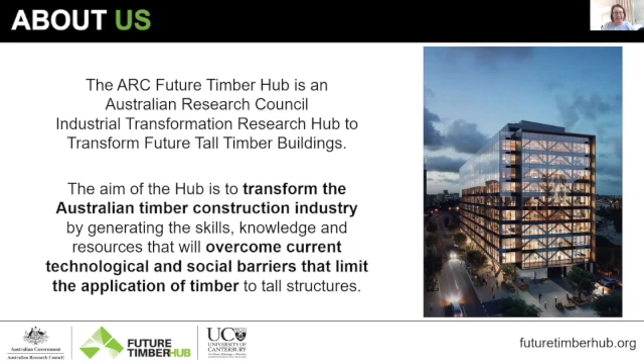Just a little bit about the ARC Future Timber Hub. It's an Australian Research Council industrial transformation research hub to transform future tall timber buildings, Future Timber Hub for short. The aim of the hub is to transform the Australian timber construction industry by generating the skills, knowledge and resources that will overcome current technological and social barriers that limit the application of timber to tall structures.

By bringing together a variety of partners, we've got experts from industry, government and academia: the Queensland Government Department of Agriculture and Fisheries, the University of Queensland, the Queensland Fire and Emergency Services, Hyne Timber, Arup, Lendlease, Scion, University of Canterbury, Griffith University and the University of British Columbia. Together we formed a unique partnership that spans the entire timber supply chain from primary producer to construction regulator. Our interdisciplinary team includes product manufacturers and scientists, architects and structural engineers, fire safety engineers, and construction managers.

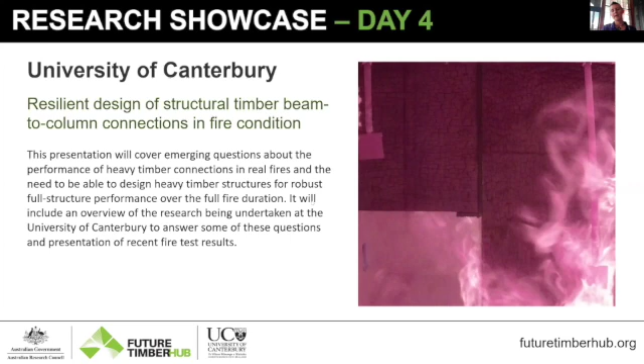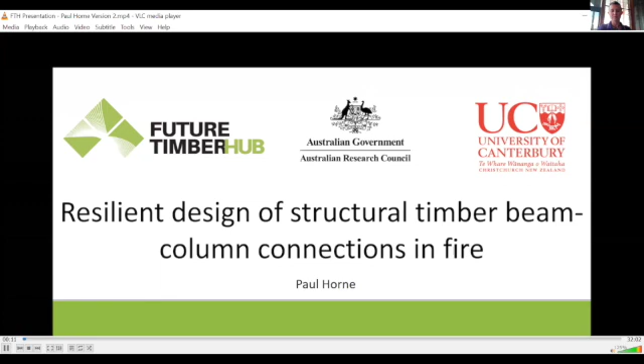Hello, my name's Paul, and thanks for tuning in to my presentation looking at the research that I'm doing on timber beam column connections in fire. In this presentation, I'll start by briefly discussing what fire exposures to structures look like and what we're concerned with. I'll then give a quick overview of post-tension timber structures, which are the type of structure that my research is primarily focused on. I'll then give you an overview of my research project, and then we'll look at the results from a recent fire test that was conducted 3 days ago.

Building codes require that structural elements have fire resistance ratings or fire resistance levels. Let's revise how these ratings are determined for structural elements.

A test specimen is constructed in a furnace and is loaded. In this case here, I've shown a floor, but it could be a beam, a column, a wall, or other type of structural element.

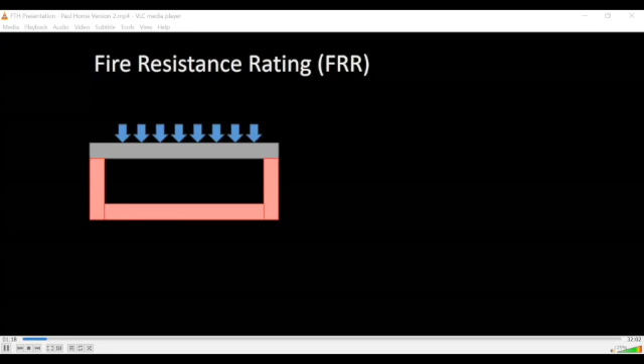The furnace is turned on, and the temperature inside the furnace follows the standard fire curve, which is shown here. This means that the temperature inside the furnace is given by this time temperature relationship.

At some time, the structural element will fail, at which time the failure time is noted. In this case, 65 minutes. But to determine the fire resistance rating, the failure time is rounded down to the nearest multiple of 30 minutes. In this case, it would achieve a fire resistance rating of 60 minutes.

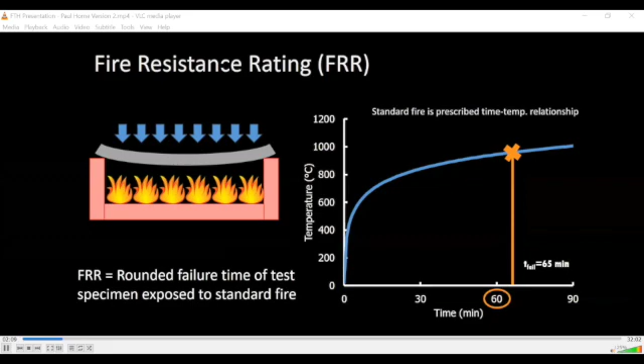This figure shows the standard fire in comparison to two real fires. You can see that the real fire given by the orange line heats up quicker and reaches a hotter temperature before decaying, while the yellow fire takes a much longer time to reach its maximum temperature. In comparison, the standard fire in the blue line is always heating up and does not have a decay phase.

But as we've seen, real fires, in comparison to the standard fire, have variable growth phases, decay phases, and durations. Real fires are complex and depend on many parameters, including the compartment, the size of the compartment and the compartment linings, the ventilation to the fire, and the fuel and its locations within the compartment.

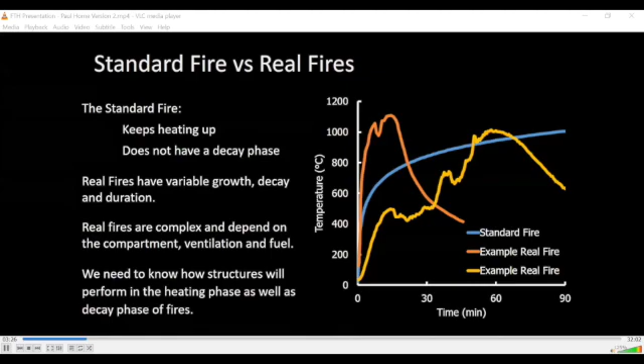Therefore, if we want to design structures so that they stand up in real fires, we need to know how structures will perform in the heating phases of fire as well as in the decay phases of fire.

The other thing to consider is the structural behavior. The structural behavior of a structural element in the standard fire test is much different to the structural behavior of that same element when exposed to a real building fire. For one, as we've seen, the fire exposures will be different, but the loading and the boundary conditions on the structural member will also be different.

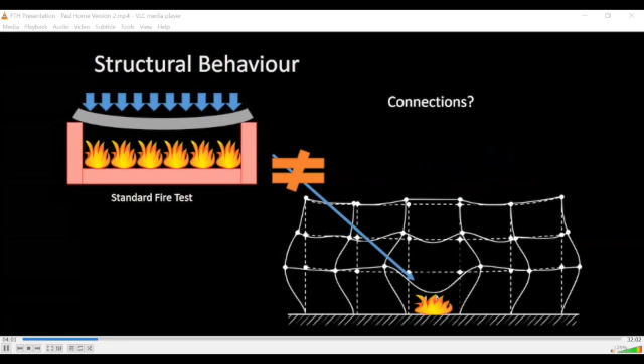Furthermore, there's the question about how the connections perform in a fire and how these affect the global structural response. And we need to know not just how an element performs in a fire, but how the whole system will perform in a fire. So, because the performance in a test is not the same as the performance of a real structure in a real fire.

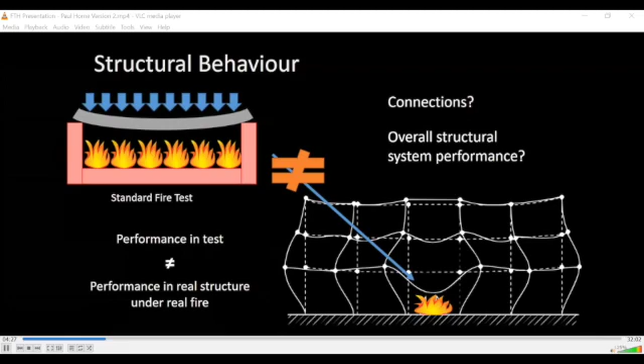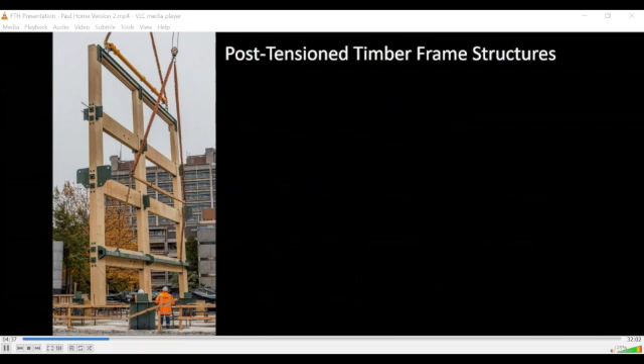Post-tensioned timber frame structures allow for the construction of large multi-story heavy timber frames.

This technology allows for the fast construction of the primary structure because many moment resisting connections can be created in a single stressing operation. In high seismic areas, a low damage lateral load resisting system can be created with energy dissipators that can be easily replaced after an earthquake, and the structure recenters.

For cases where the seismic load is much less, this technology can be applied to gravity dominated loadings, which allows for the creation of long spans utilizing deviated tendons.

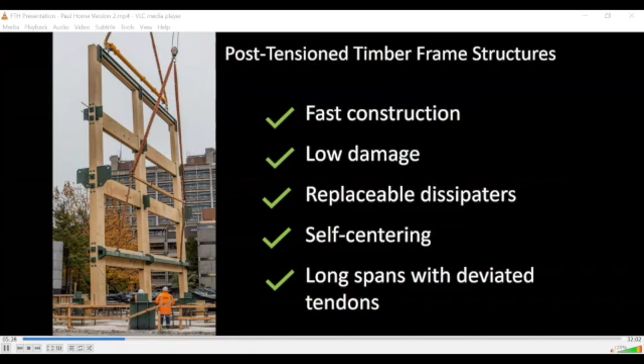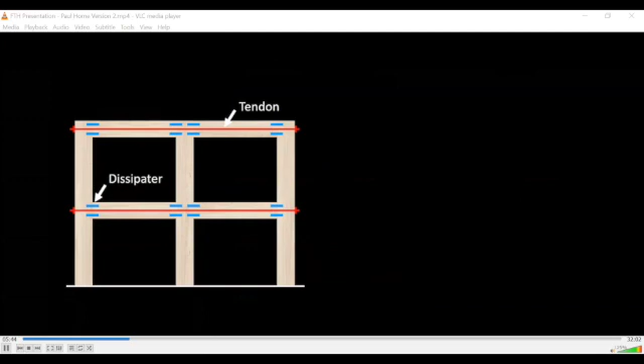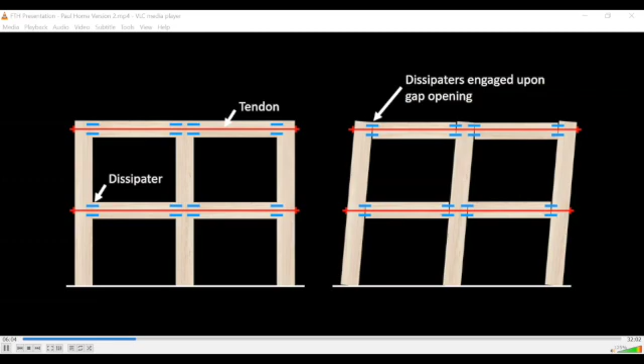Post-tensioned timber frame utilize a tendon that runs the length of the frame inside the beams and the columns, and dissipators across the beam column interface in high seismic areas. When a seismic action acts on the building, the connections rock and a gap opens, engaging the dissipators to dissipate energy. Because the tendon is tensioned up, it acts to recenter the structure after a seismic event.

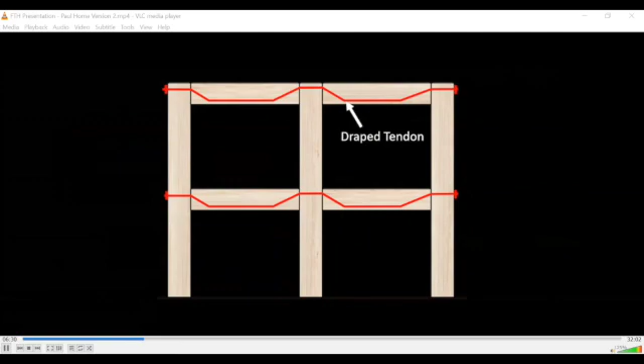For structures where seismic actions are much less of a concern and gravity loads dominate, post-tension technology can be used to achieve longer spans utilizing draped tendons, which exert a vertical upwards force counteracting the downwards gravity forces from gravity loads.

This type of structure uses a tendon that runs the length of the frame inside the beams and the columns, which is tightened up to provide a compressive force along the axis of the beams and the frames. Then dissipators can be installed either side of the beams, and these are activated when the column rocks. And then there is a shear key, which can be internal or external, to transfer the shear from the beams to the column.

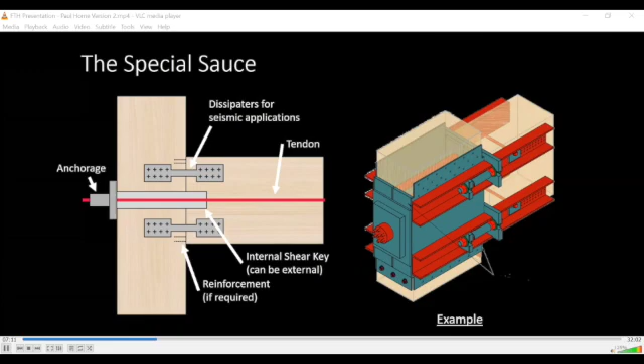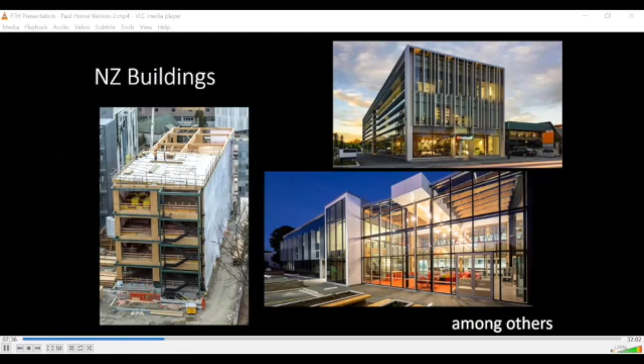Current design practice for the design of post-tension timber structures in fire uses what's called the unprotected approach, where unprotected refers to the fact that the tendon and the anchorages are not protected from the fire. Because of this, it is assumed that the tendon and the dissipators heat up and lose all strength and stiffness, and consequently the beams are treated as simply supported.

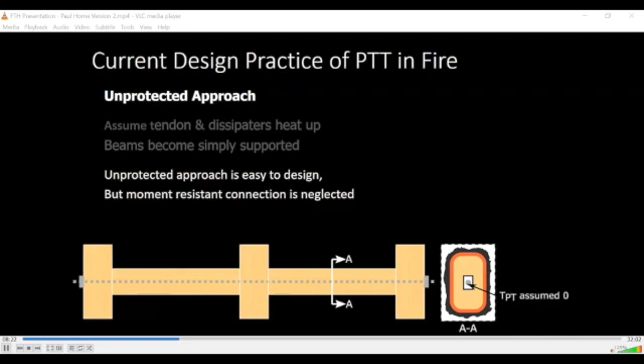While the unprotected approach is easy to design for, the moment-resistant connections are neglected. Of the 7 post-tension timber buildings surveyed in 2013 in New Zealand, they all used the unprotected approach, where the effective sections of the beam and column are reduced by the char depth and a zero strength layer to account for the hot wood under the char layer.

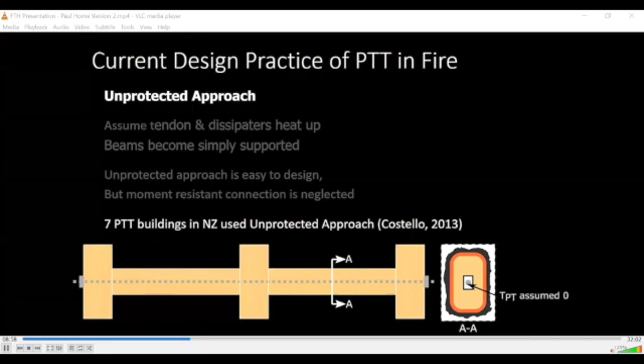And the tendon and dissipators are neglected. There are several problems with this approach. The first is that the design and construction effort and expense of the post-tensioning system and the dissipators is wasted because they are simply neglected.

Perhaps most importantly, these design methods do not actually assess how the connection will actually perform in the fire. Furthermore, only the standard fire exposure is recognized, not real fires, which have decay phases. There's no experimental basis for the performance of these connections in fire, and so the effect of detailing is unknown.

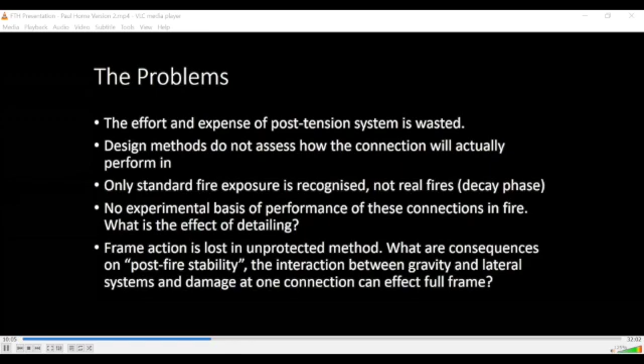Frame action is lost in the unprotected method, and so there are questions about the consequences of this on post-fire stability and the interaction between gravity and lateral systems, and the fact that damage at one connection can affect the full frame because the tendon runs the length of the frame.

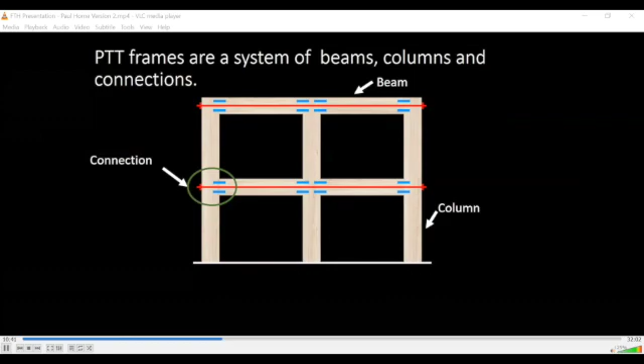Post-tension timber frames are a system of heavy timber beams, columns, and connections consisting of tendons and dissipators as required. In a fire, the heavy timber beams and columns will behave as typical heavy timber members do in a fire, with a charring layer forming on the outside of the cross-section. The key to understanding the full system performance of these structures when exposed to a fire lies in understanding the connections, as these are the critical components which will govern the overall structural performance.

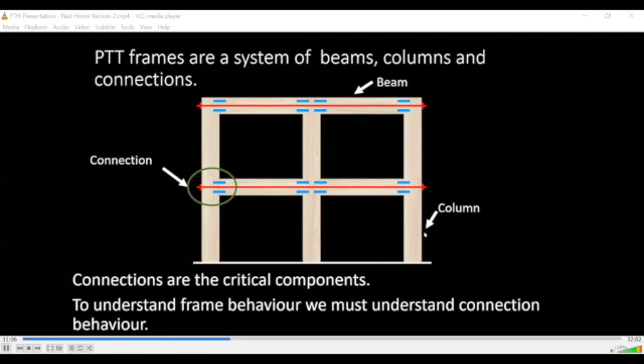So, if we want to be able to design our structures to perform in a real fire over the full duration of that fire, we need to understand how the connection behaves to understand how the whole frame will behave.

To illustrate how different connections in timber structures perform differently to the heavy timber members themselves, we'll examine this simple case. If we take a cross-section through this beam after it has been exposed to a fire for some time, a char layer will have formed on the surface, underneath which there is a hot layer of wood, which we call the zero strength layer, because it is so hot that we consider it to have zero strength. And the remaining internal of the section is the load carrying portion of the section, known as the effective section.

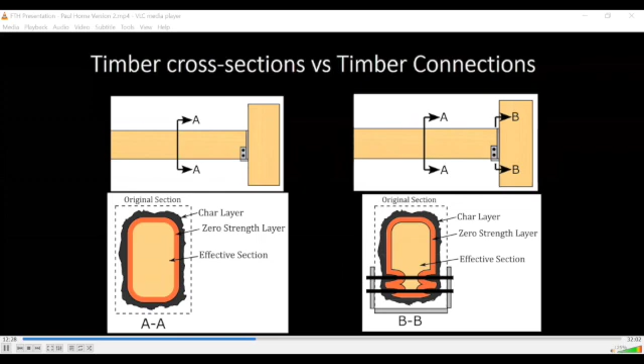If we compare this to a section taken through a connection which has a steel bracket with 2 bolts here, we see that because the steel components heat up, they conduct heat deep into the inside of the connection, and they change the zero strength layer and change the effective section of the cross section at this point. And this illustrates how different the performance of timber connections is to the performance of heavy timber cross sections.

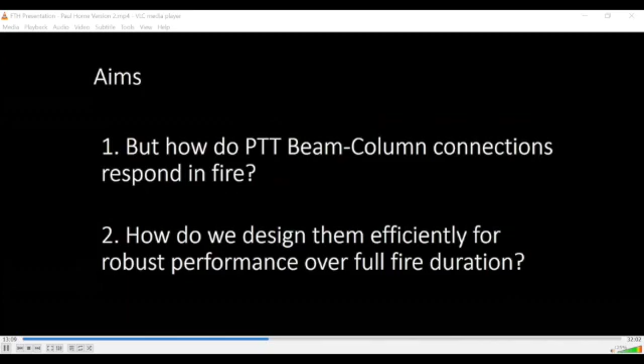So given that we need to be able to assess the full structure performance of buildings exposed to fire, of which the connections will play an important role, my research has 2 aims. The first is to investigate how post-tensioned timber beam-column connections respond in fire, and 2, how do we design these structures efficiently for robust performance over the full duration of the fire. And while my research focuses on post-tension timber buildings, the general principles will apply to all timber buildings.

So since we know how these connections perform at ambient and how in general timber and steel materials respond to fire, we can come up with how we expect these connections to perform when exposed to fire. During the initial stages of the fire, the tendon force in the tendon will still be relatively high, and the decompression moment at the connection will be greater than the applied load.

But as the tendon heats up and the decompression moment decreases, a gap will eventually open at the connection so that the dissipators can be utilized to provide additional moment resistance.

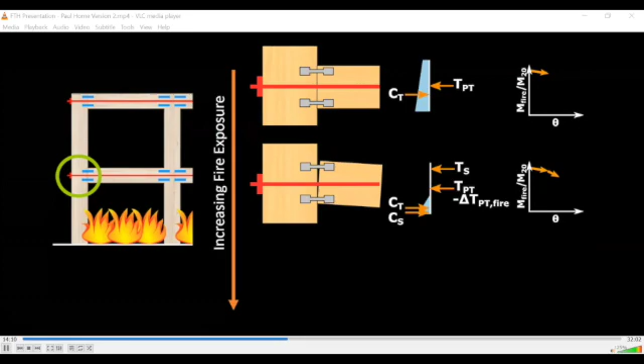As the tendon continues to heat up and undergo thermal elongation, the tendon force will continue to decrease, and the dissipators will heat up and lose strength and stiffness, and so larger and larger rotations will be required to maintain the load-bearing capacity of the connections.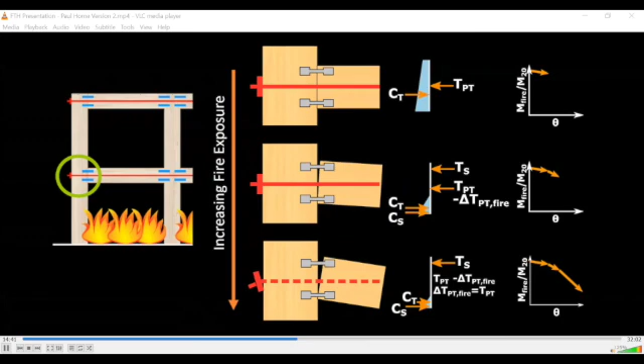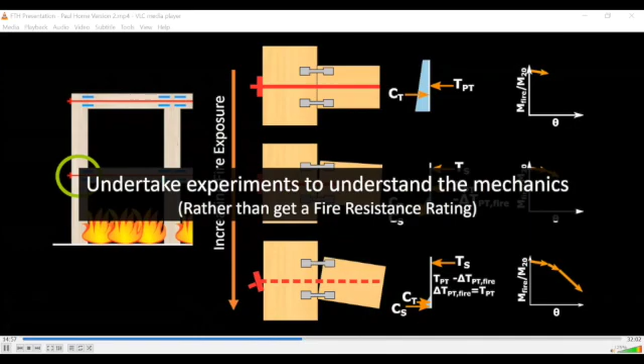But we need to undertake some experiments to quantify all of these effects and break down the complex interactions between all of these components. So we need to undertake experiments to understand the mechanics of how these connections perform, rather than undertaking fire tests to get a fire resistance rating as traditional fire testing does.

My experimental program has 7 tests in total. 2 of these tests examine connections under shear loadings. The first of these uses a steel bracket screwed to the column, while the second uses a CHS epoxied into the beam.

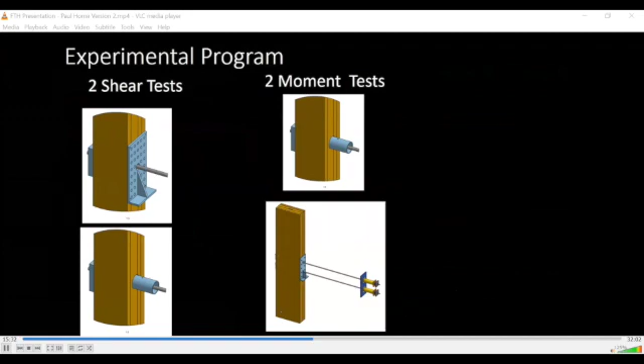There are 2 tests where connections are subject to moment loads. The first of these uses a CHS epoxied into the beam, and the second uses a steel bracket fixed to the column with coach screws.

And then there are 3 tests that look at the same connection under the same loading, but where the fire exposure is changed, to examine whether a fast cooling phase or a slow cooling phase is more severe for timber connections.

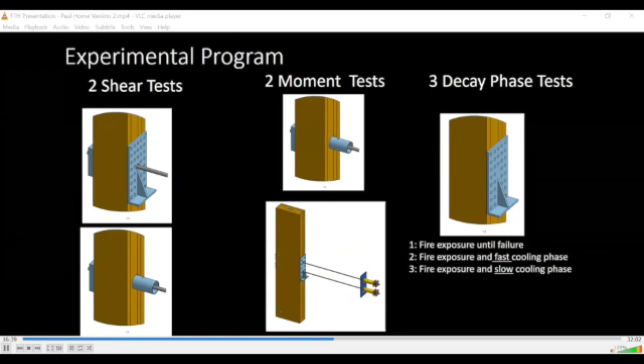6 of these tests use smaller wood sections, 250 millimeters by 220 millimeters for the column, and the beams are 400 millimeters deep. One test uses almost 1-to-1 scale sized members that we see in real buildings, with an 800 millimeter deep column and a 700 millimeter deep beam. I'll be talking in this presentation about the recent fire test done on that large 1-to-1 scale connection, which is this one here.

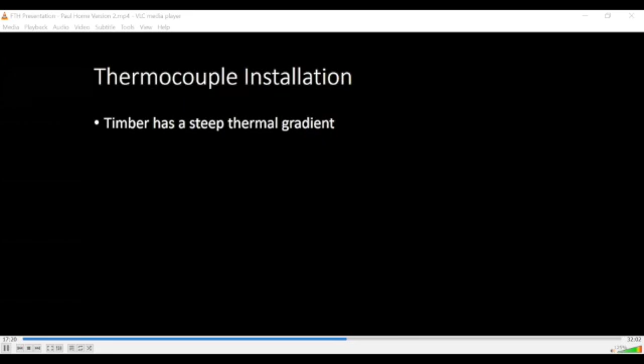One of the challenges with doing fire tests on heavy timber members is obtaining the thermal field in the timber members. To measure the temperatures, we use thermocouples, but because timber has a steep thermal gradient, we need several thermocouples at a location to capture the thermal gradient, which is quite steep because timber is a poor conductor of heat, and there is the moisture that must be driven off, which absorbs energy.

So the method of how you install a thermocouple can have a big influence on the temperatures being measured. Two of the concerns are having good thermal contact between the hot junction, which is the bead between the two thermocouple wires you can see there, and the wood, and ensuring not too much heat is conducted down the thermocouple wire away from the hot junction. The other concern is knowing where these thermocouples are located in the wood.

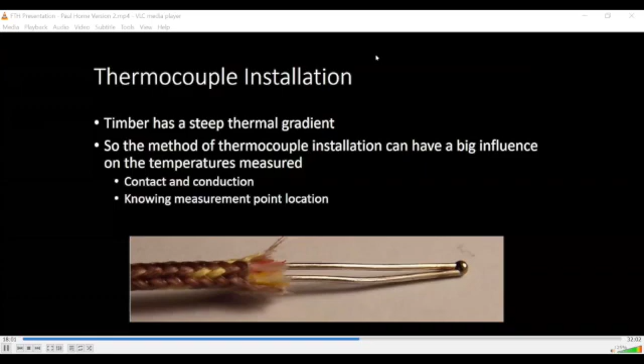For these tests, considering the large size of the timber members, I routed small grooves in the surface of the timber laminations, and I glued the thermocouple wires into these laminations. This way I knew where the thermocouple junctions were, as an alternative to drilling in the thermocouples, where with drill wander the thermocouple junction can end off target a little.

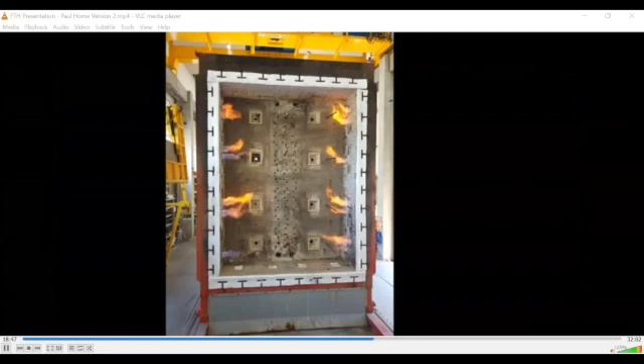The testing is conducted using the large furnace at the Building Research Association of New Zealand, or BRANZ. It's shown here undergoing its pre-burn test, where you can see some of the burners on the side of the furnace are activated. This is basically like a really large barbecue that can heat the specimens up to over 1100 degrees.

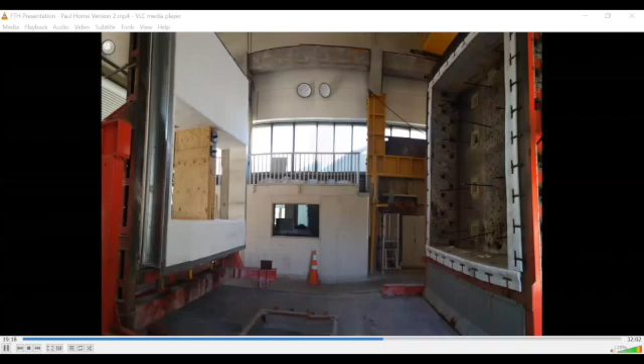The test specimens are located on a trolley, shown here on the left, which is then wheeled up against the furnace to form the enclosure.

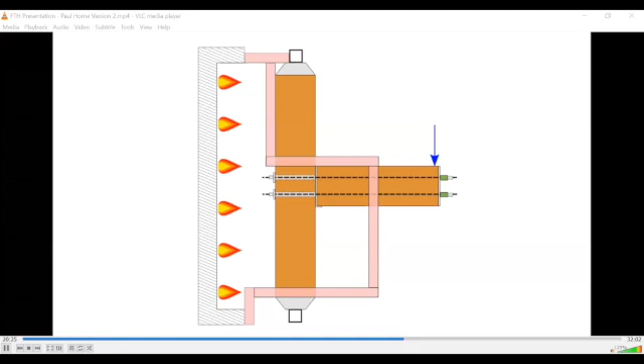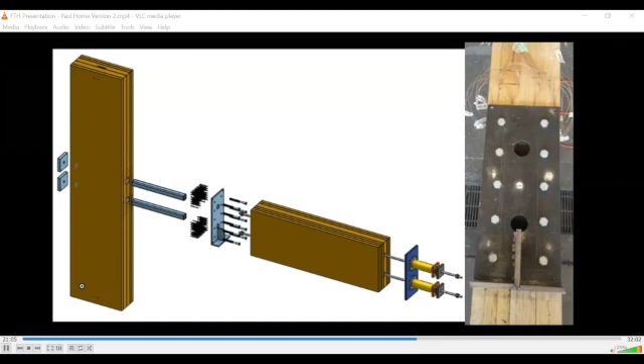The timber column was 800 millimeters deep by 300 millimeters wide and 3.6 meters high, and the timber beam was 700 millimeters deep and 2 meters long.

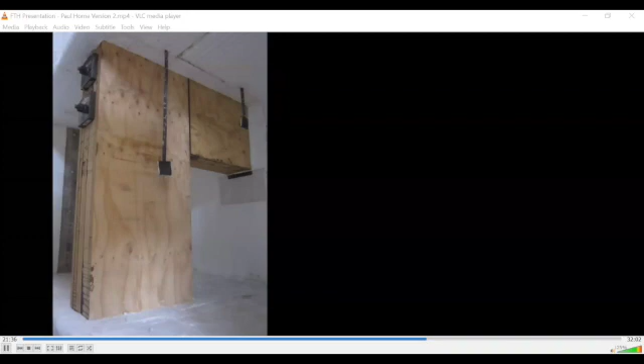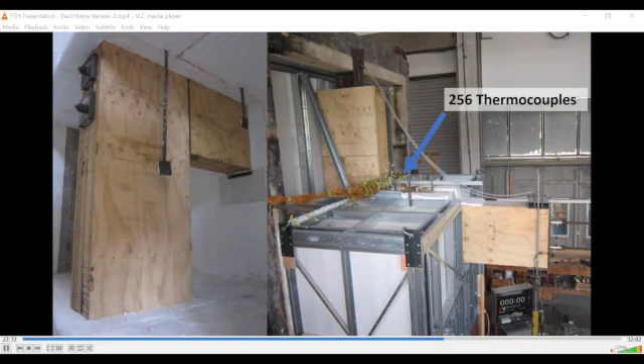There were over 256 thermocouples used in this test, and that pushed both logging systems right to their capacities.

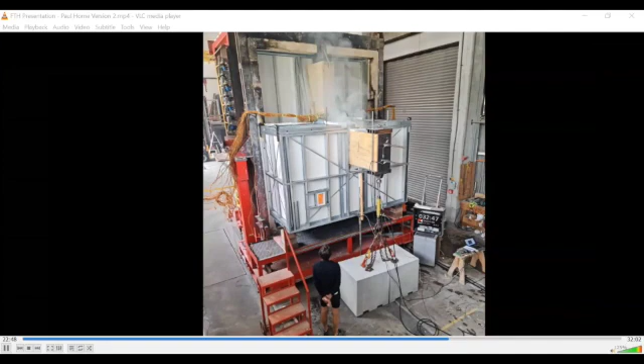This is a photo showing the test underway at 32 minutes through the exposure. There are two small windows that we fitted into the enclosure, one in the middle of the photo there to look up at the connection, and there's one on the right hand side of the enclosure to get an elevation view of the connection.

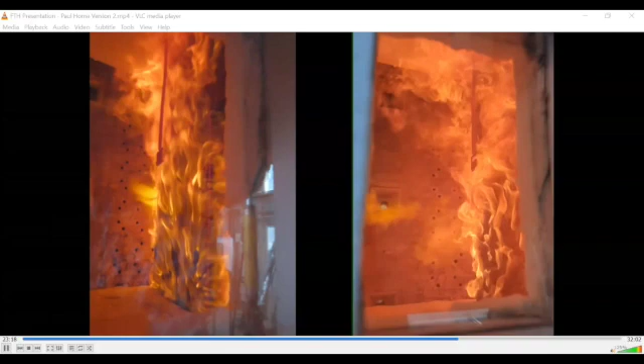These photos give you a sense of what the conditions are like inside the furnace. You can see the flames on the timber column here, and this is a slow motion video of what it's like inside the furnace.

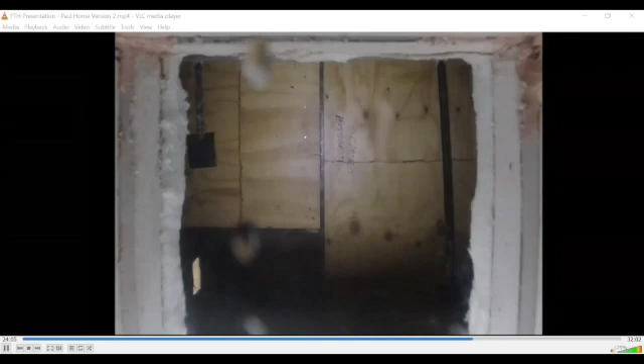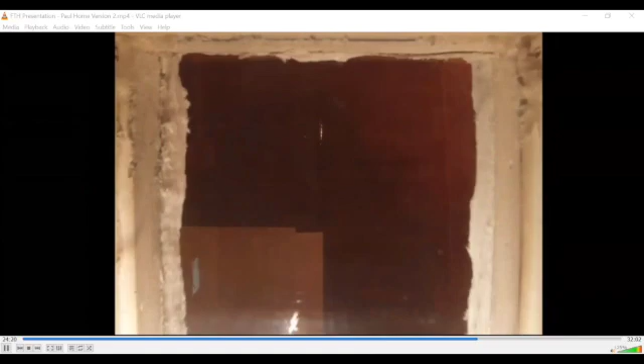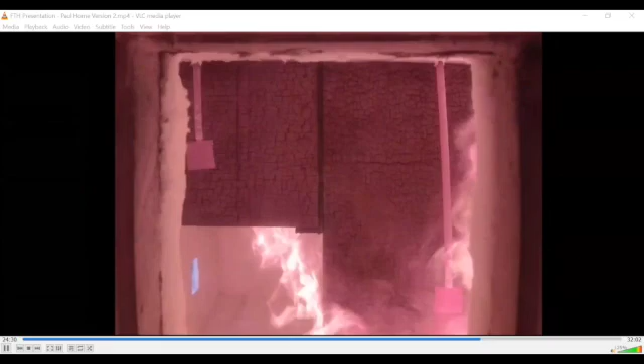This is a time-lapse video of the elevation of the connection. You can see that it takes a few minutes before the timber surfaces ignite and the char surface forms. Now we begin to observe cracking of the char on the timber surfaces, and then only at the very end of the fire exposure does a gap begin to open at the connection.

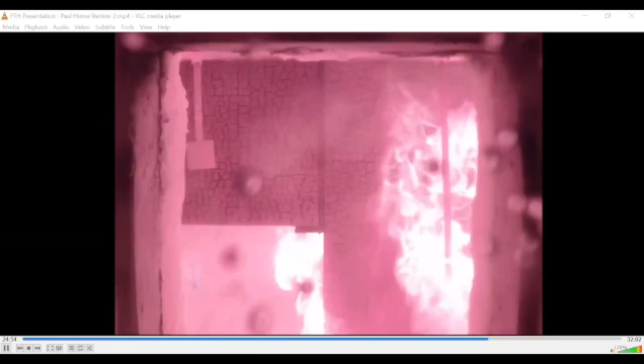This footage was recorded using a GoPro in a water bath, but some of the water on the surface got quite hot.

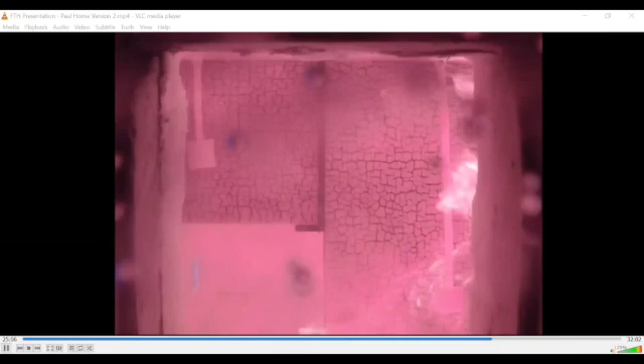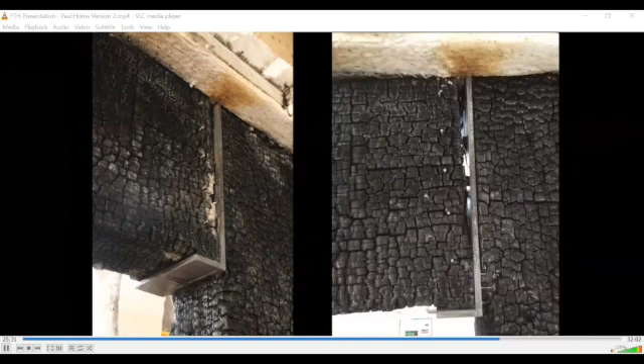These are a close-up view of the connection, and you can see the gap that has opened. You can see that charring occurred on all surfaces, and on the right-hand image at the bottom you can see how the steel plate is bearing on the reinforcing screws that were placed in the timber column.

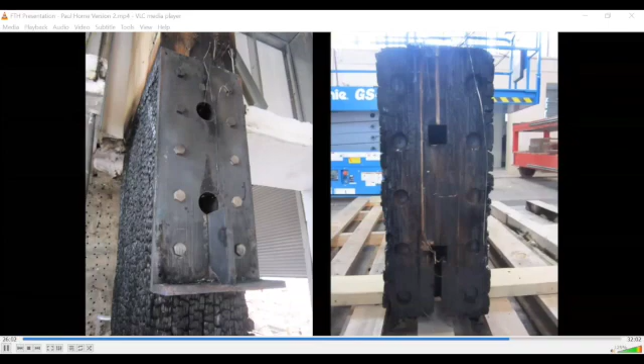These two images show the steel bracket and then the beam end that was placed against the steel bracket. You can see the timber on the end of the beam did begin to burn, as it's all black, and those wires are thermocouples that were used to measure the interface temperatures between the steel bracket and the end of the beam.

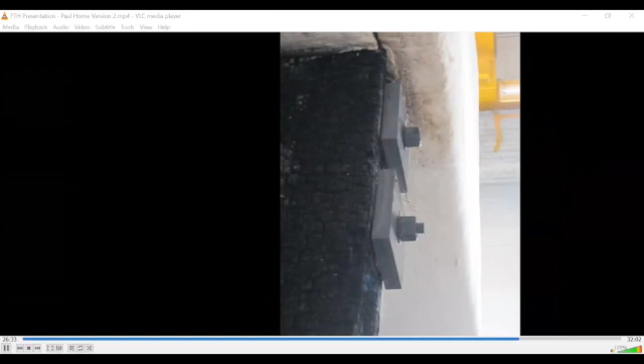One of the interesting observations we observed during the test was what was happening at the anchorages. This is a photo of the anchorages at the end of the test, and both anchorages started the test with the same amount of thread outside the nut as the bottom tendon.

But you can see that the top tendon, as the nut and the thread got hot from the fire, the bar actually got pulled through the nut.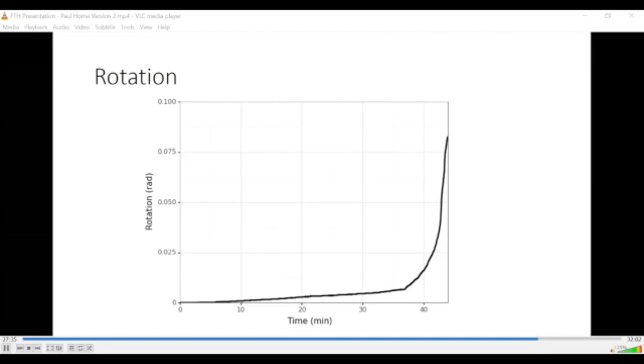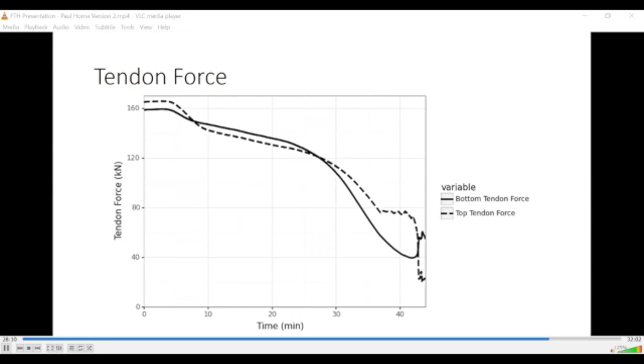The tendons each had a load cell equipped to measure the force in the tendons. During the first 30 minutes of the fire, both tendons have a similar tendon force, but after 30 minutes, the bottom tendon decreases in force much quicker than the top tendon. There's a plateau from about 37 minutes, which is where the pulling through of the thread on the nut occurs.

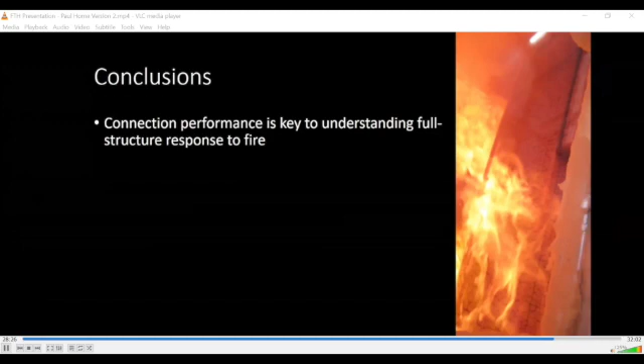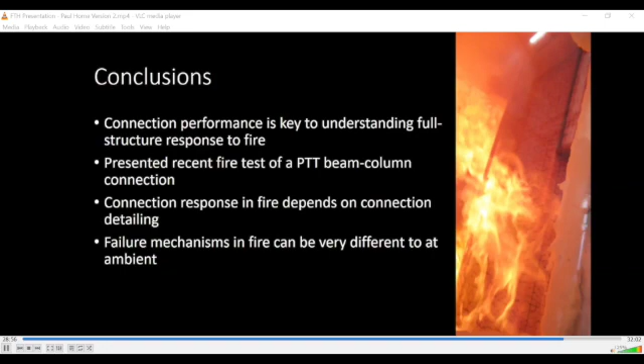So in conclusion, we've seen that understanding how connections perform in a fire is key to understanding the full structural response in a fire. We've looked at the results of a recent fire test of a post-tensioned timber beam column connection and observed how it responded to a fire. We've seen through that example that the connection response in fire depends on the specific connection detailing, and that failure mechanisms in fire can be very different to those at ambient.

The experimental component of my research is being undertaken at BRANZ, because they are the only people in New Zealand with the furnace facilities for structural fire research. I've also been asked to show you some of the other fire facilities they have there.

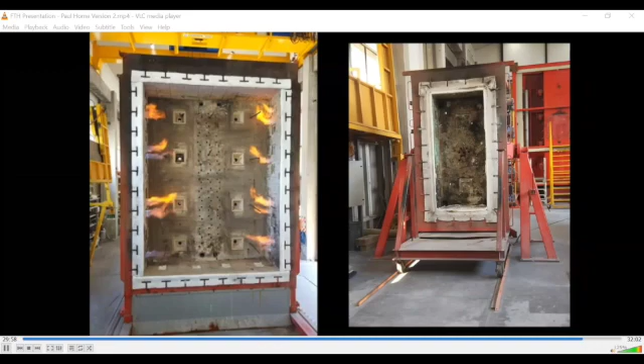BRANZ also have what's called an ISO room, used for conducting tests according to the ISO 9705 standard, which is used for testing wall and ceiling lining materials for reaction to fire. In this test, all the surfaces of the room are lined with the test material, a small burner is placed in the corner of the room, and then the amount of energy from the fire and the combustion products released are measured.